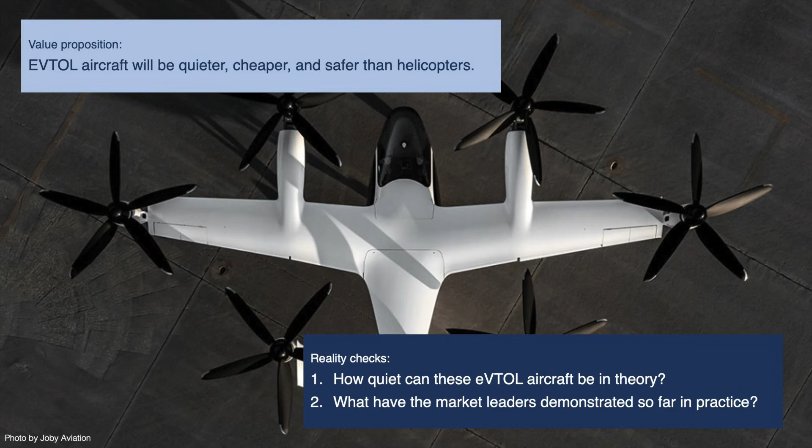To answer these questions, this video reviews patents on noise by Joby Aviation, noise optimizations by the wider industry, and flight test videos by Joby and Archer.

Let's start with Chapter 1. How do aircraft generate noise? To answer this question, we have to understand what sound waves are. Afterward, we will look at a specific subset of sounds we call noise. Finally, we will examine the different sources of aircraft noise.

First, the physical properties of sound waves. An aircraft uses atmospheric air to stay airborne and propel itself forward. In doing so, the air between the aircraft and our ears vibrates, and our hearing system perceives these pressure fluctuations in the air as sounds.

To fully understand how aircraft generate noise and what eVTOL companies are doing about it, let us start from the beginning by reviewing the properties of sound waves with the following clips.

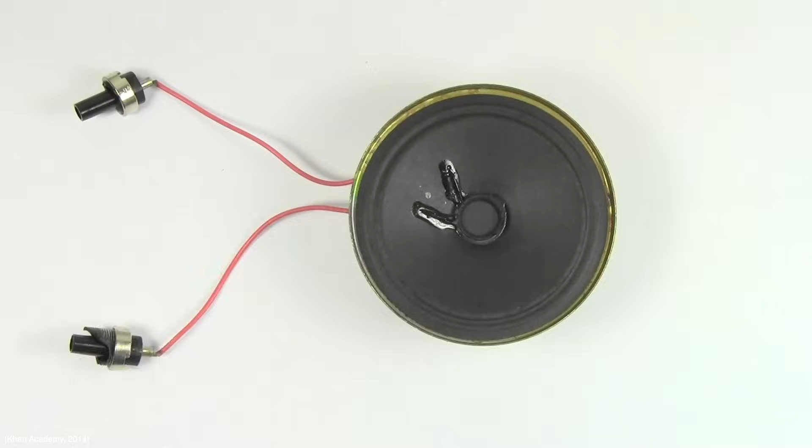This is what a sound wave sounds like. But what does a sound wave look like? Well, the air through which the sound wave is traveling looks something like this. But if you want another visual representation of the sound, we can hook this speaker up to an oscilloscope and it gives us this graph.

We say that this shape represents the sound wave because if we focus on a single molecule of air, we see that it moves back and forth just like a sine or cosine graph. The horizontal axis here represents time, and the vertical axis can be thought of as representing the displacement of that air molecule as it oscillates back and forth.

If we turn up the volume, we see that the oscillations become larger and the sound becomes louder. The maximum displacement of the air molecule from its undisturbed position is called the amplitude.

Another key idea is the period of a sound wave. The period is defined to be the time it takes for an air molecule to fully move back and forth one time. We call this back and forth motion a cycle. We measure the period in seconds, so the period is the number of seconds it takes for one cycle.

If we decrease the period, the time it takes for the air molecules to oscillate back and forth decreases, and the note or the pitch of the sound changes. The less time it takes the air molecules to oscillate back and forth, the higher note that we perceive.

An idea intimately related to the period is called the frequency. Frequency is defined to be 1 over the period. So since the period is the number of seconds per oscillation, the frequency is the number of oscillations per second. Higher notes have higher frequencies and lower notes have lower frequencies.

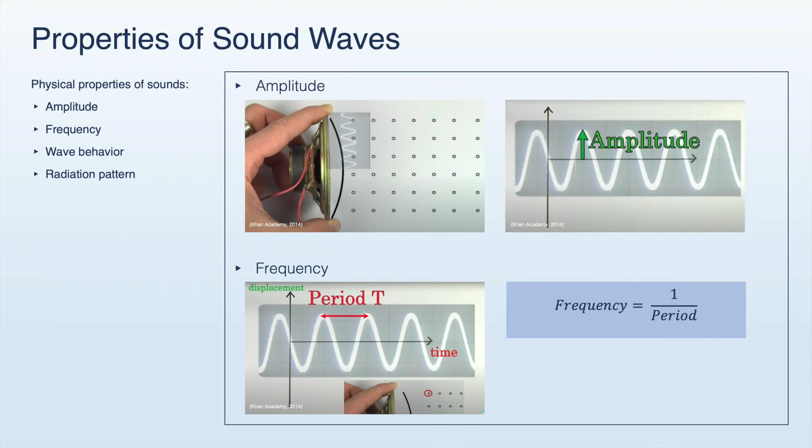As the clip showed, sound waves are pressure fluctuations with an amplitude and a frequency. While we cannot see sound waves with our eyes, we can with experiments.

In this video, we're going to use our Schlieren optics setup to try to visualize sound waves traveling through the air. The transducer here is producing sound waves, and every time it produces a wave, we're going to flash a light on for just a few microseconds, and that will effectively freeze that wave in space. But you're not going to see just one wave frozen in space, because this thing produces 28,000 waves every second. So you will see a whole series of them frozen in space.

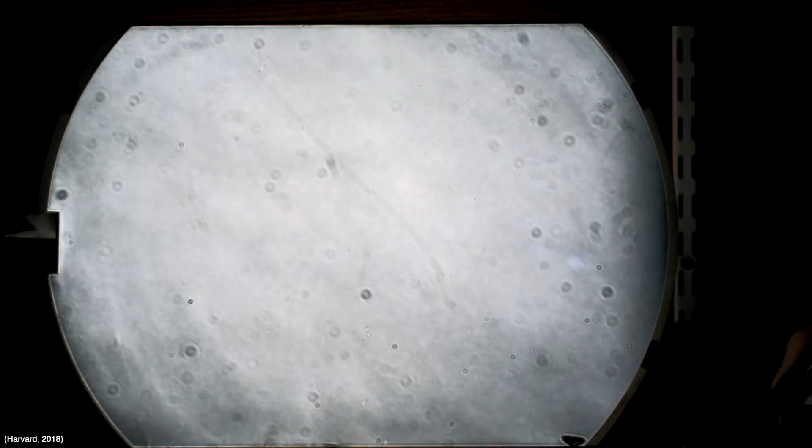So let's have a look. All right, I'm going to turn on the sound waves, the transducer.

Seeing the waves move forward, we can now show you some characteristics common to all waves. Here's a piece of plastic I'm going to use as a reflector and put it into the path of these traveling waves. You can see the waves are reflected upward. If I move the reflector to the other position, I can reflect them downward so they bounce off the base of the mirror and back up again.

If I set this reflector down, you will see that the waves also bend around this barrier. They bend around and actually go into the shadow of the barrier, and this is what we call edge diffraction.

As the clip showed, sound waves propagate in patterns, and they become reflected, diffracted, and absorbed by objects they encounter. Therefore, acoustic and aircraft engineers can manipulate the sound source and its surrounding environment to control how sound waves are radiated and distributed in space, and thus perceived by our hearing system.

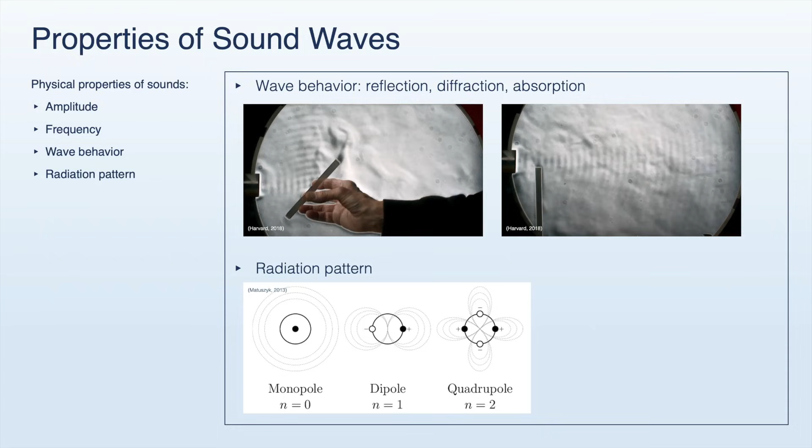Next, let's watch a clip of how common sounds actually look, using the same experimental technique from the previous clip. Here's a book landing on a table, the end of a towel being snapped, a firecracker, an AK-47, and of course, a clap.

We just examined the physical properties of sound waves. Let's move on to the next topic: what is noise, and how can we define it?

Noise is a term for undesirable sounds that evoke negative psychological reactions, such as annoyance, anger, or even pain. Noise generally has two components: loudness and annoyingness.

For example, loud music at a restaurant can be perceived as noisy. However, the same music can be pleasant if the sound level is lowered to the right volume. So, loudness plays a role in our perception of noise, and louder sounds are generally more likely to be noisy.

However, loudness alone is sometimes not enough. For example, music at a concert can be very loud but not perceived as noisy by its attendees. On the other hand, some sounds can be relatively quiet but still considered noise because of their spectral distribution or context. For example, the sounds of a person eating with their mouth open can be quiet but still perceived as noisy by other people.

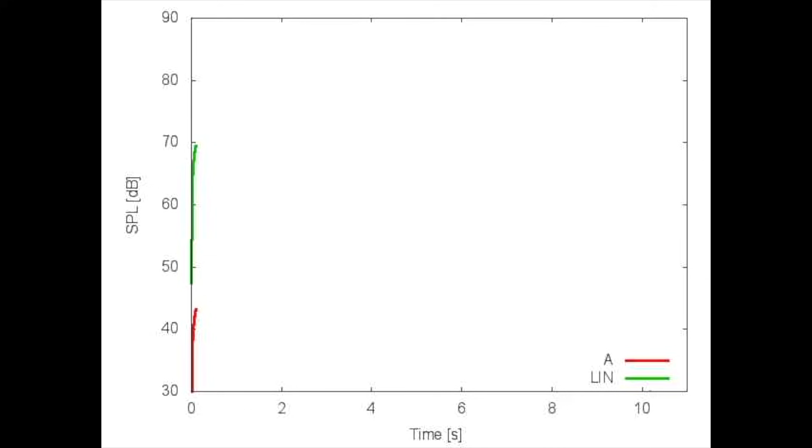Loudness also depends on distance. Sounds become quieter as they move away from the source. One reason is attenuation, which is the conversion of acoustic energy to heat. As air particles transfer the sound wave, they convert some acoustic energy to heat, resulting in the sound wave losing sound pressure and becoming quieter. If you stand further away from the sound source, you receive sound waves that have experienced more attenuation and have lower sound pressures. Furthermore, sound waves with higher frequencies attenuate more quickly.

The other reason is that sound waves propagate and expand. As we saw in the previous clip, sound waves expand outward from their source. Therefore, the acoustic energy gets distributed over an increasingly larger area. For example, consider a spherical propagation pattern. If you double your distance from the source, the sound intensity reduces by a factor of 4. And if you triple your distance, the sound intensity reduces by a factor of 9.

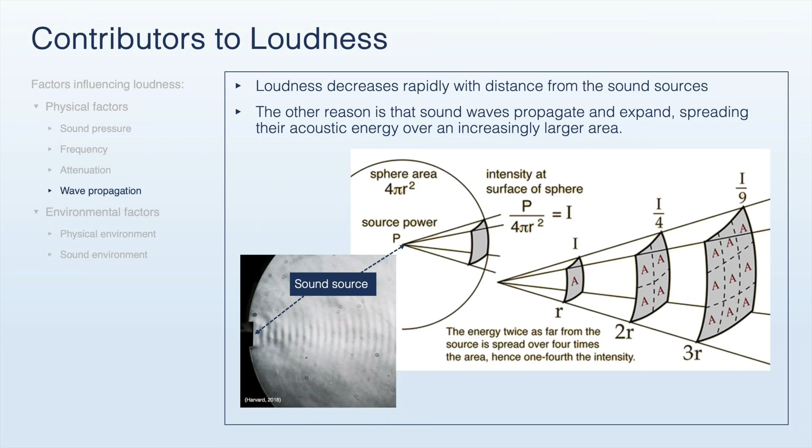Loudness also depends on environmental factors. Sound waves interact with their physical environment. As we saw earlier, sound waves can be reflected, diffracted, and absorbed by objects they encounter. So the physical environment influences how acoustic energy is distributed in space and how we perceive sounds.

For example, is the aircraft flying in an environment with many sound reflective surfaces like asphalt roads and concrete walls? Or is it flying in a more sound benign environment like an open grass field that can absorb sound waves?

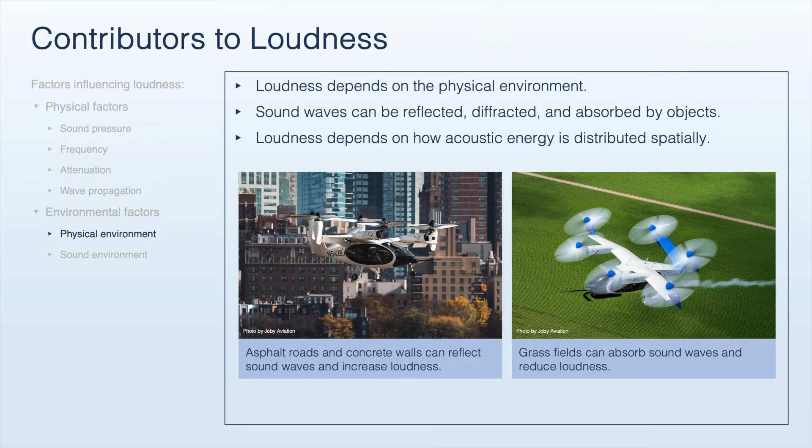The sound environment also plays a role in our perception of noise. Our hearing system constantly searches for sounds that stand out. For example, a person whispering at a loud party may go unnoticed, but the same person can be easily heard in a quiet exam room.

So an eVTOL aircraft may be perceived as noisy in a quiet neighborhood, but may blend in and be less noticeable in a noisy city center.

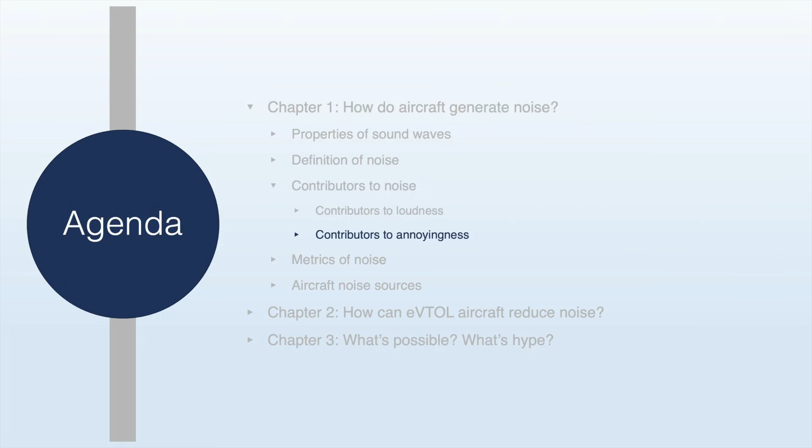We just discussed loudness, one of the two components of noise. Now let's discuss annoyingness, specifically the contributors to annoyingness.

Annoyingness depends on the sound's physical characteristics and the human context. Regarding physical characteristics, sounds can vary in loudness, pitch, duration, rhythm, and so on. Generally speaking, continuous and predictable sounds are less disruptive than intermittent and irregular sounds.

Sounds can also be narrowband or broadband. Narrowband should generally be avoided because they stand out more and capture our attention more easily. For example, a police siren produces tones that grab our attention immediately. On the other hand, sounds generated by the winds or the sea are less distracting and attention-grabbing, even if they are loud, due to their broadband characteristics.

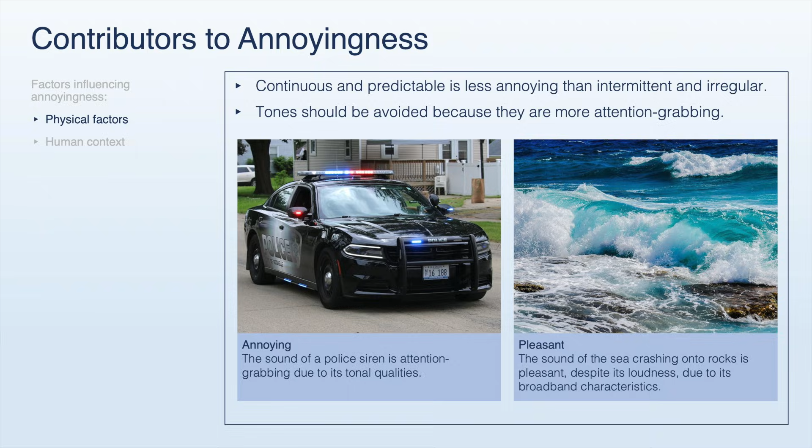The human context also determines whether the sound is disruptive or not. For example, different cultures have different expectations for their sound environment. There are varying norms and tolerances for noise.

People can have different attitudes toward air travel, influencing their perception of the aircraft and, by extension, the aircraft's noise. For example, communities that regularly benefit from air travel may find the noise less irritating because they associate it with something positive.

Psychological factors, such as an individual's mood, stress levels, and focus, also play a crucial role. A person trying to concentrate on a task might find aircraft noise more bothersome than in other situations. On the other hand, people at an airshow may enjoy the sounds emitted by the aircraft.

In summary, noise has two components, loudness and annoyingness. Now let's discuss the different metrics of noise.

Let's start with the metrics of sound pressure. We commonly use a decibel meter with a built-in microphone to measure the sound pressure. The results are displayed in decibels or adjusted to A-weighted decibels.

So what are decibels? It is a dimensionless unit that functions like a percentage, describing a measured sound pressure in terms of a reference sound pressure. For example, a reading of 20 micropascals is converted to 0 decibels, and a reading of 20 pascals is converted to 120 decibels. But why do we use decibels?

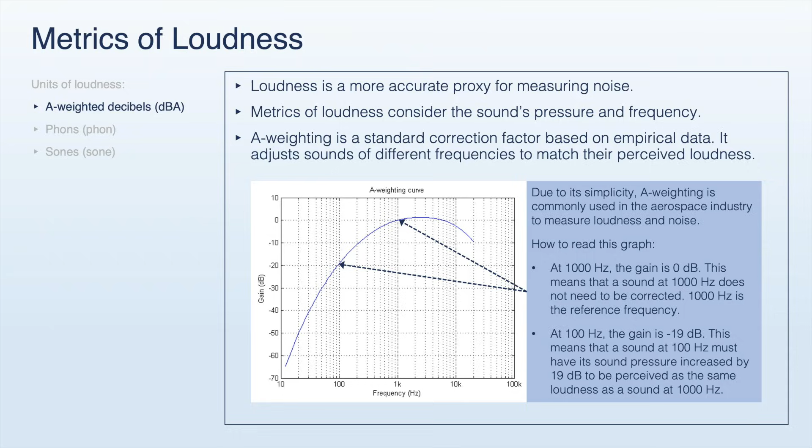Sounds at other frequencies have their decibel values adjusted to reflect their equivalent loudness at 1 kHz. For example, a sound at 100 Hz and 59 decibels would be as loud as a sound at 1 kHz and 40 decibels.

Phon is another unit of loudness and is generally more accurate than A-weighted decibels. The A-weighting curve we saw earlier is based on the 40 phon equal loudness contour of the Fletcher-Munson curves. To create these curves, a group of people were invited to experiments where they were asked to evaluate the loudness of different sounds. In this way, scientists were able to capture the frequency dependency of loudness.

Finally, let's discuss the unit sone. Sones were invented with the help of empirical data to measure loudness on a linear scale, making it more intuitive to use. For example, doubling a sound's sones equals doubling its loudness. Contrast this with pascals and decibels, where doubling a sound's pascals or decibels does not equal doubling its loudness.

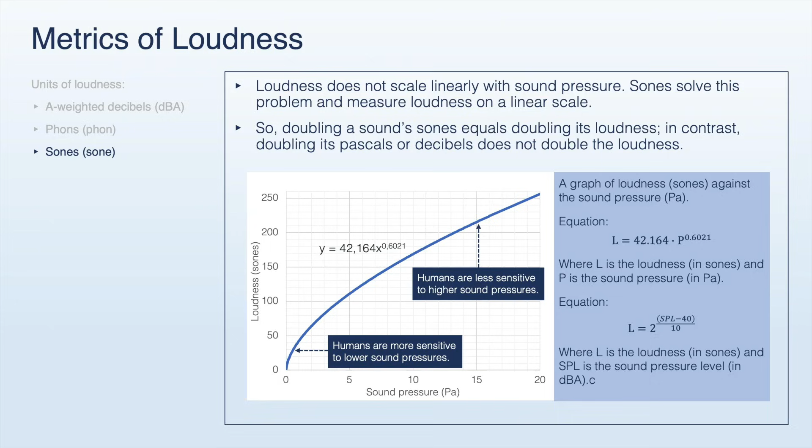We just covered one component of noise. Let's briefly cover the other component, annoyingness. Annoyingness depends on the sound's duration, tonal content, and context.

The metrics sound exposure level and effective perceived noise level are based on A-weighted decibels and consider a sound's annoyingness to measure noise more accurately.

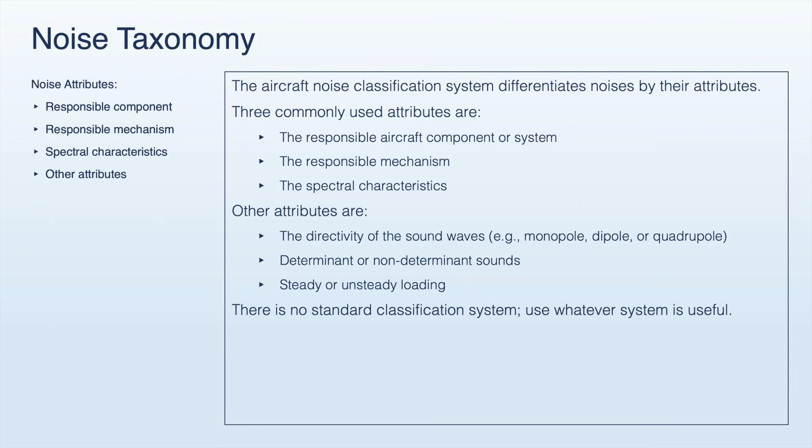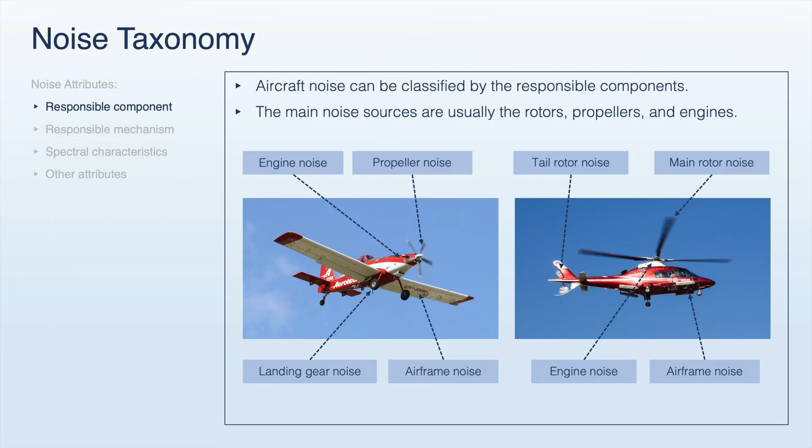Aircraft noise can be classified by the responsible components. The main noise sources are usually the rotors, propellers, and engines. Some noise contributions come from the airframe and landing gear.

Finally, sounds generated by these mechanisms can have different spectral characteristics. For example, they can be tonal or broadband, high frequency or low frequency. An aircraft's spectral characteristics play a crucial role in our perception of loudness and noise, so it's important to distinguish the different noise sources by their contributions to the overall sound profile.

We just covered 3 attributes that are commonly used for noise classification. Other attributes can be considered to improve the discussion in specific contexts. For example, noise can also be classified by the sound wave's directivity, or whether it can be determined analytically. However, we will not use these attributes for our discussion today.

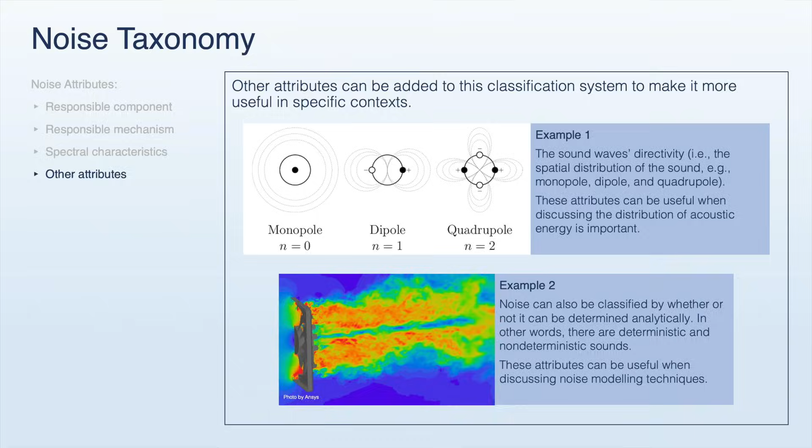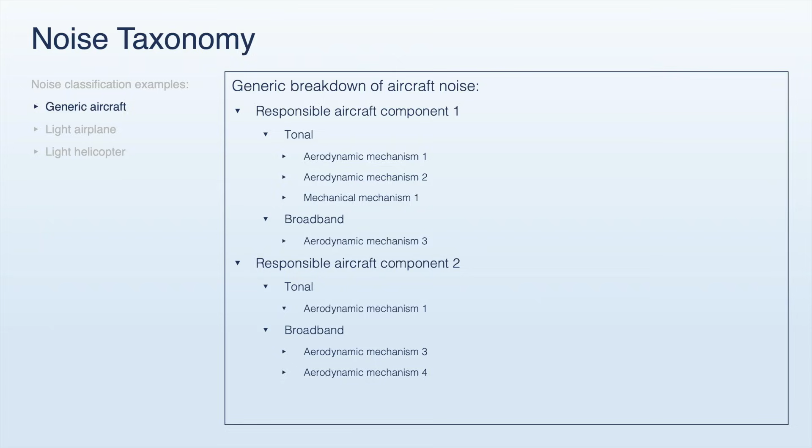By convention, we classify the noise sources as follows. We first classify them by the responsible aircraft components, then by the spectral characteristics, and finally by the responsible mechanism. This hierarchy helps us break down the complexity of aircraft noise and obtain deeper insights into their mechanisms. Let's look at 2 examples to see how this classification system works.

The propeller is the dominant noise source for an airplane, so it is broken down and analyzed as shown. For a helicopter, the main rotor and the tail rotor are the dominant noise sources, making them the focal points of acoustics optimizations.

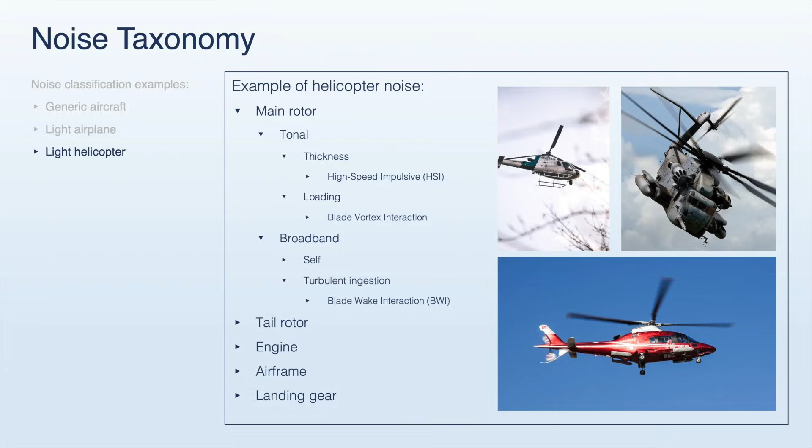Using this classification system, let's examine the different mechanisms for airplane noise. For subsonic aircraft, the main noise sources are the propellers and the engines. The airframe and landing gear are noise contributors, but are generally less noticeable in the presence of a spinning propeller. Hence, for scoping reasons, we will only examine propeller noise today.

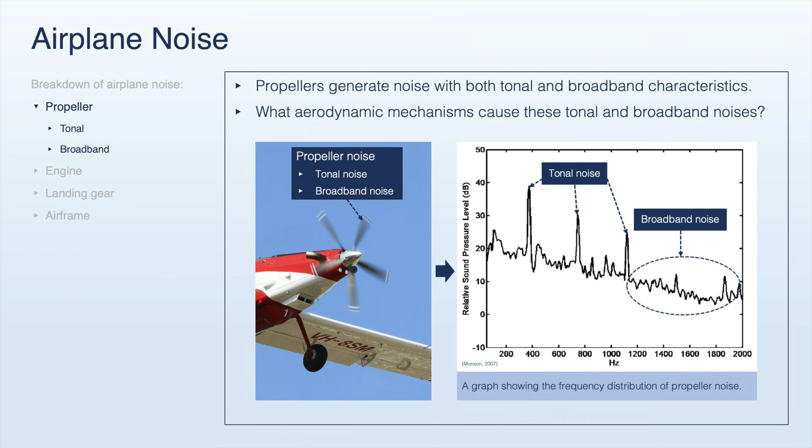The propeller generates noise with both tonal and broadband characteristics. Let's examine the mechanisms for these different characteristics.

Tonal noise is generated by two mechanisms: blade thickness and blade loading. First, as a propeller blade cuts through the air, it forces air to be moved onto its upper and lower surfaces. This air displacement creates pressure fluctuations in the air and, therefore, sound waves and noise. Second, as the air moves along the airfoil, it generates a pressure field and aerodynamic loads like thrust and drag. These aerodynamic loads also result in pressure fluctuations and noise.

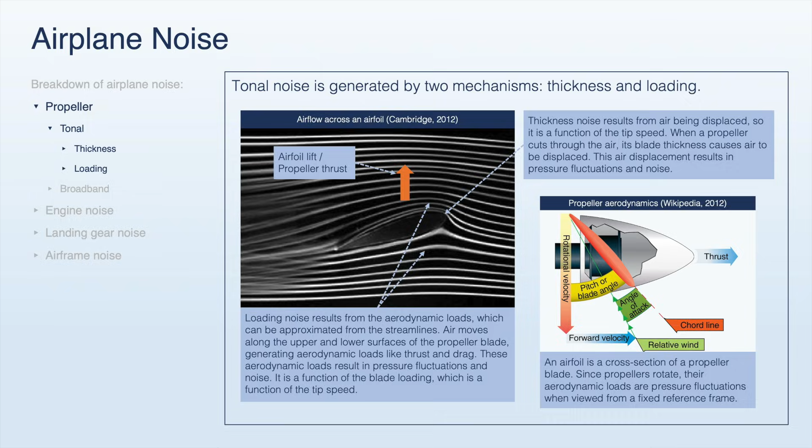But why do air displacements and aerodynamic loads create pressure fluctuations? Since a propeller spins about an axis, the air displacement and aerodynamic loads we just mentioned are based on a rotating frame. Hence, from a stationary point of view, these occur in an oscillatory manner. For example, the propeller blade causes air to compress in half of a revolution, but causes it to decompress in the other half. The same compression and decompression are repeated in the next revolution, resulting in pressure fluctuations. These pressure fluctuations occur at a frequency equivalent to the propeller's rotational speed.

The frequency of tonal noise depends on the frequency at which propeller blades pass a fixed point, the blade passage frequency. In other words, the frequency equals the number of revolutions per second multiplied by the number of propeller blades. If the number of revolutions per second increases, the sound wave's frequency and pitch also increase. This is why, for example, your washing machine has a lower pitch when spinning slowly, but a higher pitch when spinning faster.

Regarding the blade count, if the number of propeller blades increases, the sound wave's frequency and pitch also increase. For example, if the blade count is doubled from 2 to 4 and the rotational speed is held constant, then the blade passage frequency doubles and the tonal noise increases by an octave in pitch.

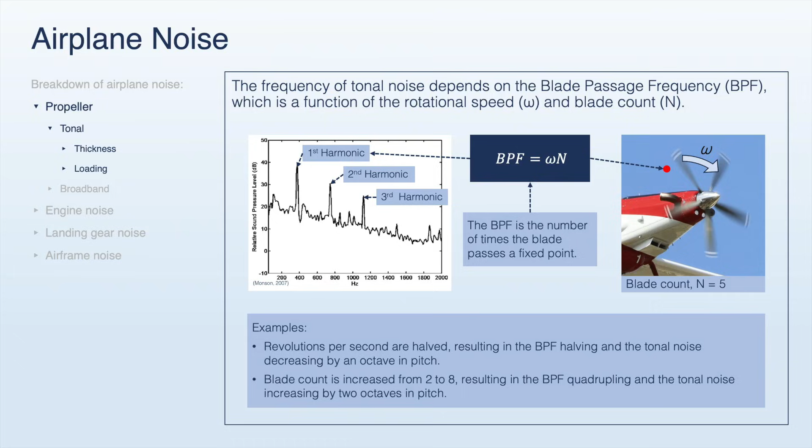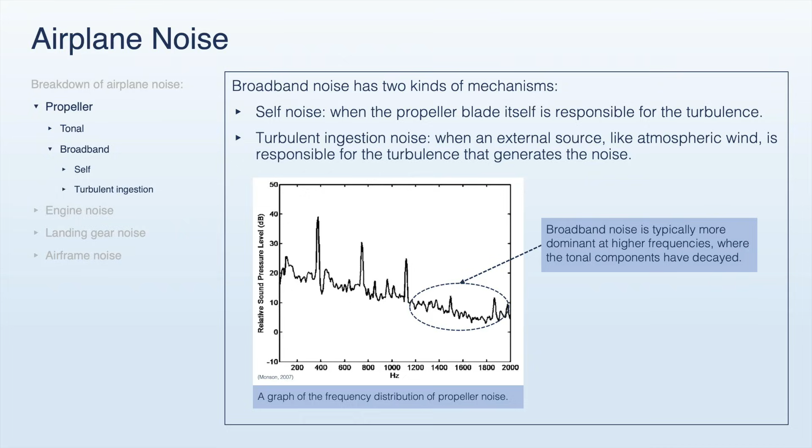Next, let's discuss broadband noise. Broadband noise results from random pressure fluctuations on the blade surface. It is typically more dominant at higher frequencies where the tonal components have decayed. These random pressure fluctuations are generated by the blade itself or induced by an external source, such as winds or the turbulent wake of another propeller.

Then there is turbulent ingestion noise. This category includes, for example, blade-wake interaction noise and atmospheric turbulence interaction noise. Blade-wake interaction noise results from a blade passing through the wake of a preceding blade or the wake of a preceding propeller. Atmospheric turbulence interaction noise is due to the propeller interacting with turbulent winds.

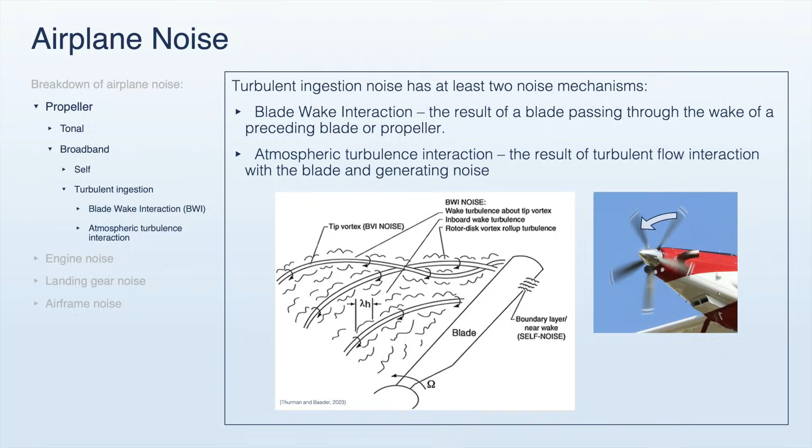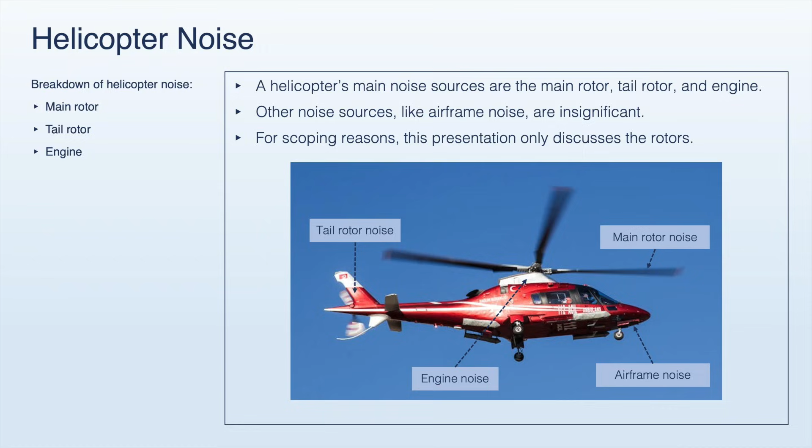Okay, we just covered airplane noise. Next, let's talk about helicopter noise. For a helicopter, the major noise sources are the main rotor, the tail rotor, and the engine. For scoping reasons, we will only examine the main rotor today.

Rotor noise can also be divided into tonal and broadband components, just like before with propeller noise. The tonal components can be attributed to the rotor blade thickness and aerodynamic loading, as was the case for propeller noise.

However, a key difference between rotors and propellers is that a rotor can have high-speed impulsive noise. This is generated when the rotor blades, typically on the advancing side, reach transonic or supersonic speeds. Compressibility effects become significant as the blade's relative airspeed approaches the speed of sound, leading to shock waves and sonic booms.

Helicopters have rotors operating in edgewise flow, so the relative airspeed at the advancing blade is the sum of the flight speed and tip speed. In contrast, airplanes have propellers operating in axial flow, so there are no advancing and retreating blades, and the relative airspeeds at the blades are mostly uniform. Therefore, airplanes do not have high-speed impulsive noise.

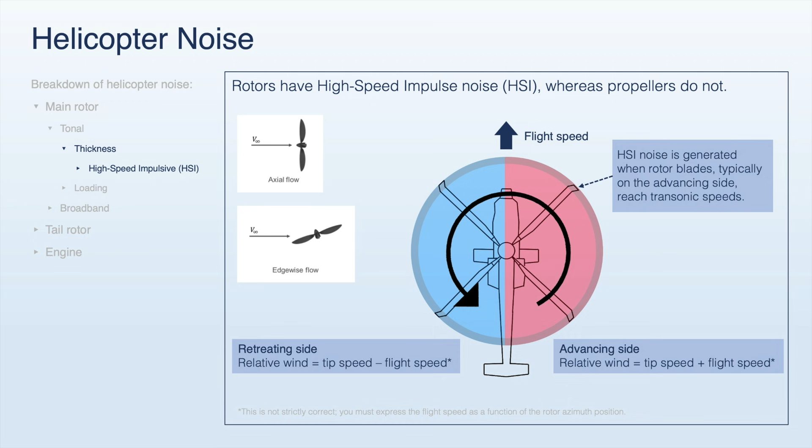Another key difference between rotors and propellers is that rotors can have blade vortex interaction noise, otherwise known as blade slaps. Blade vortex interactions are usually the noisiest mechanism, as they can result in very loud sounds. They result from a rotor blade interacting with the tip vortex of a preceding blade. This interaction leads to impulse-like loading at the rotor's leading edge, and this noise appears as sharp impulses on a sound spectrum.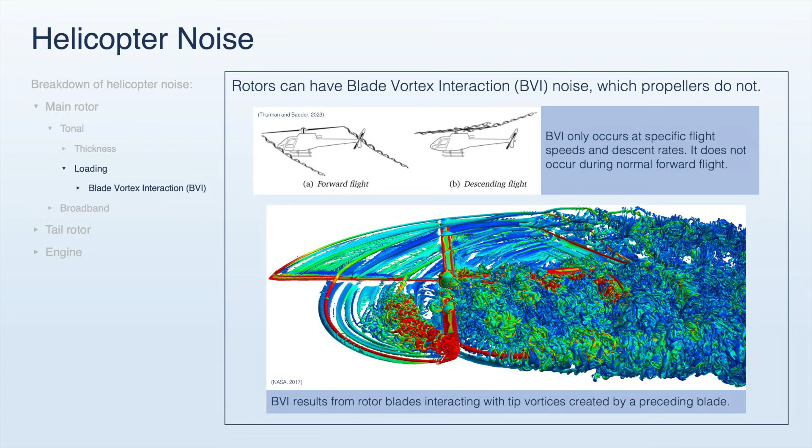Here is a demonstration of blade slaps. First, this is what tip vortices look like. This is what blade vortex interactions look like.

So I'll show you guys what blade slap is here. Blade slap occurs if you're at a high rate of speed and a low collective setting. So I'm going over the top of Mark Johnson's house here. We'll throw a little blade slap in there to wake him up.

Hey, you guys hear that? That's blade slap. If I go farther down, it goes away. If I come back up like that, it goes away.

In summary, here are the key points for how aircraft generate noise. First, noise is an undesirable sound and a subjective metric. Noise is a function of loudness and annoyingness, and sound pressure can be used as a basic proxy for noise measurements. More accurate noise metrics use empirical data to capture the human's subjective response to different sounds. Aircraft certification requires accurate noise metrics like the sound exposure level or the effective perceived noise level.

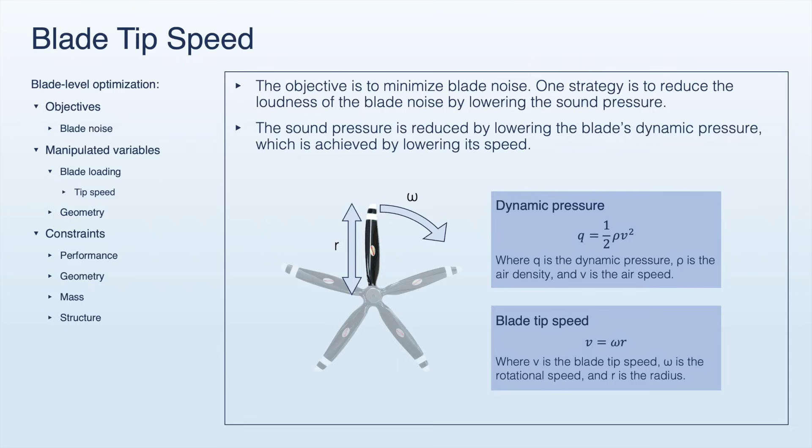Let's first discuss noise reduction strategies at the blade level. Blade tip speed: the objective is to minimize blade noise. One strategy is to reduce the loudness of the blade noise by lowering the sound pressure. The sound pressure is reduced by lowering the blade's dynamic pressure, which is achieved by lowering its speed. However, other engineering constraints, such as physical space and weight, limit the extent to which the blade speed can be lowered. As this equation shows, the dynamic pressure is a function of the speed squared.

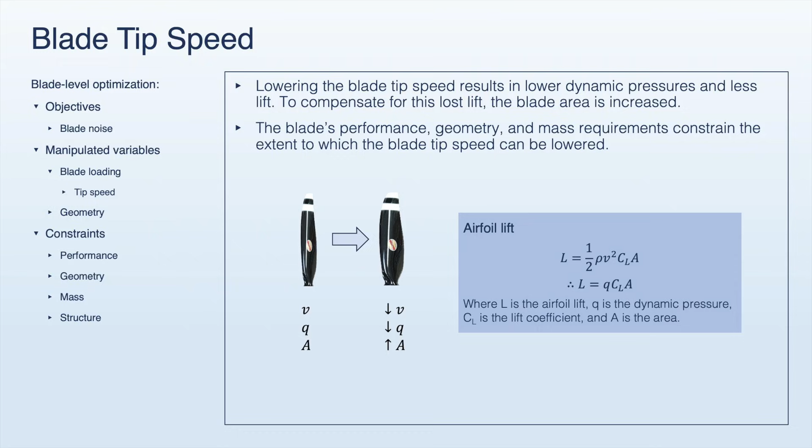So, on the one hand, we want to lower blade tip speeds to achieve lower dynamic pressure. But, on the other hand, we are constrained, because lower dynamic pressure means we must increase the blade area to maintain the thrust requirement. New technologies and innovation can move conventional design constraints. For example, Joby's propeller blades are made of carbon fiber and titanium, which use their low mass densities to enable large propellers and lower blade tip speeds.

So here's one of the propulsion blades. It's carbon fiber with a titanium root sleeve. This, combined with the very high specific torque motor, is what makes the acoustic profile possible.

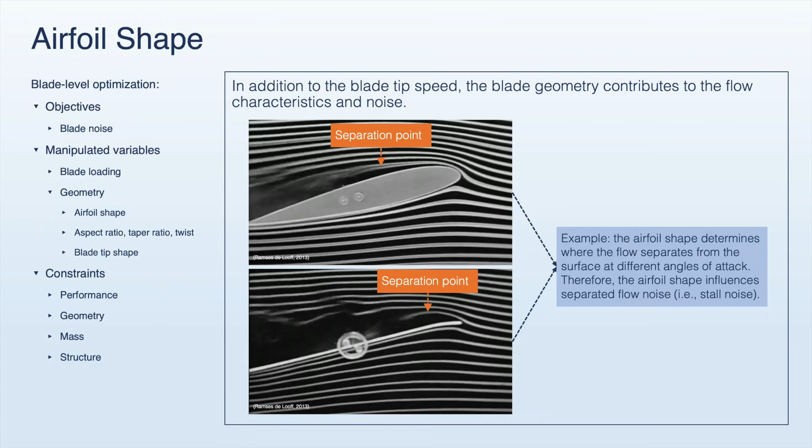Airfoil shape: in addition to the tip speed, the blade geometry contributes to the flow characteristics and noise. For example, the airfoil shape determines where the flow separates from the surface at different angles of attack. Therefore, the airfoil shape influences separated flow noise, otherwise known as stall noise. Electric vertical takeoff and landing brings new design challenges and approaches for airfoil shapes.

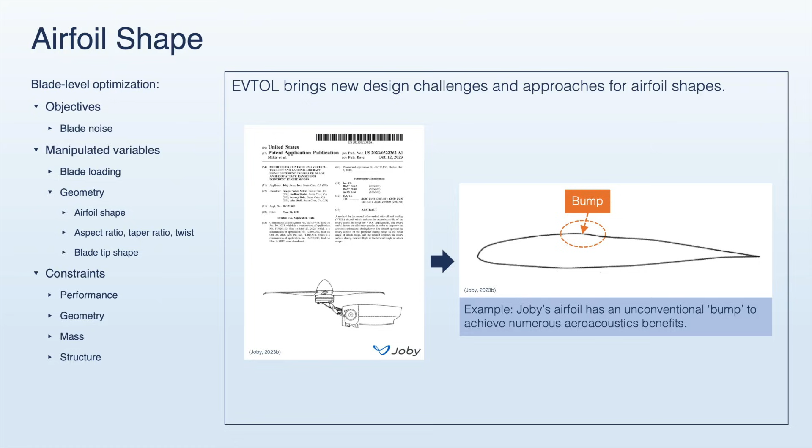For example, Joby's airfoil has an unconventional bump to achieve numerous aeroacoustics benefits. The first benefit is that Joby's airfoil enables the propeller blade to be more evenly loaded than a conventional airfoil when operating under asymmetrical inflow conditions.

When the eVTOL aircraft is flying, its rotor blades can meet random air turbulence. This turbulence means that the airflow across the rotor blade varies in speed and direction, so the blade sections experience different effective angles of attack. As a result, the blade sections generate different levels of lift and drag, creating pressure fluctuations in the air and thus noise.

The second benefit is that Joby's airfoil enables more gentle stall behavior and possibly reduces noise from flow separation.

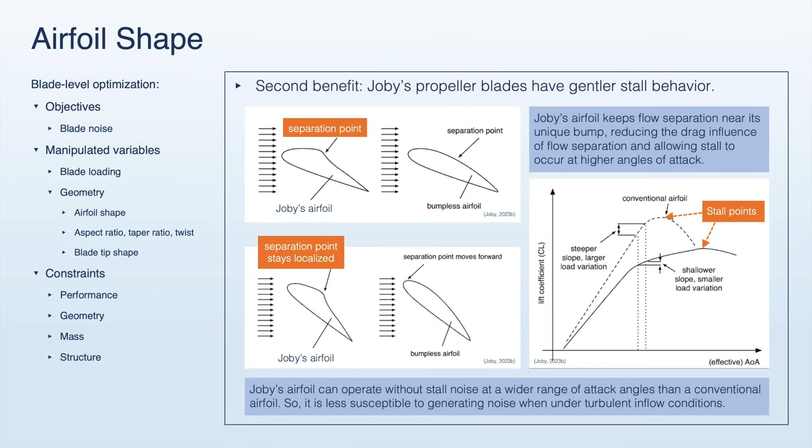Other important blade parameters include the taper ratio, the twist rate, and the aspect ratio. These three parameters can be varied to optimize the blade loading distribution, tip losses, and noise. For example, a higher taper ratio and a higher aspect ratio minimize the pressure losses and tip vortices at the blade tip. Thus, like other aerospace companies, Joby uses acoustics modeling, simulations, and experiments to optimize these blade parameters for noise.

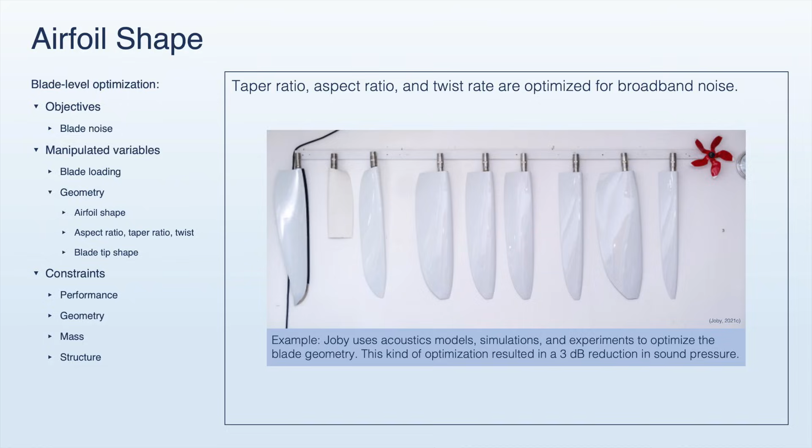Next, let's compare eVTOL aircraft to conventional aircraft at the blade level. Aeroacoustics optimization at the blade level can also be conducted for all other aircraft types, including conventional helicopters. For example, Eurocopter's Blue Edge blades use a unique geometry to lower noise. So, electric vertical takeoff and landing does not bring an inherent aeroacoustic advantage at the blade level.

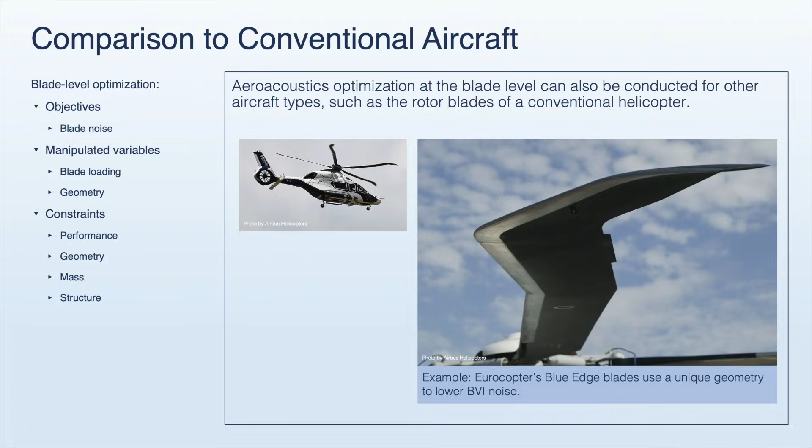Next, let's talk about noise reduction strategies at the rotor or propeller level. First, rotor solidity. The objective is to minimize rotor noise. A rotor consists of rotor blades, so one strategy is to reduce the sound pressure by lowering the blade loading. The blade loading can be lowered by decreasing the disc loading or increasing the rotor solidity.

Since eVTOL aircraft have much higher disc loadings than conventional helicopters, they must use higher rotor solidities to achieve low noise. However, higher rotor solidities have several downsides, including greater rotor weight, greater motor weight, and lower efficiency.

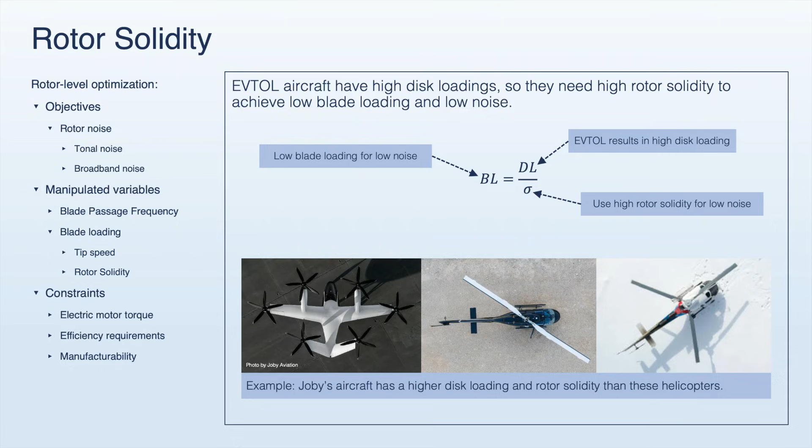As these pictures show, Joby's aircraft have higher rotor solidities than comparable helicopters. As discussed, this is because the blade loading must be low to minimize pressure fluctuations and sound pressure. But at the same time, electric vertical takeoff and landing results in high disc loadings. Joby mitigates the downsides of high rotor solidity with a propeller made of carbon fiber and titanium and an electric motor with a very high specific torque.

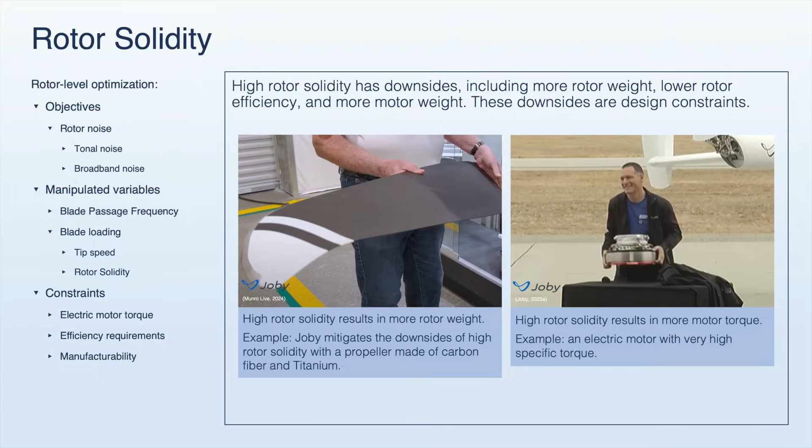Blade passage frequency. As discussed in Chapter 1, the blade passage frequency determines the pitch of the sound waves. One way to reduce noise is to increase the frequency so the sound waves become ultrasonic and inaudible to humans. The following clip demonstrates the potential of this noise reduction strategy.

Most engines are very loud.

For now, why don't you tell us, just super high level, what are the things that can keep an engine like yours both efficient but also quiet? Yeah, so the trick that we do is we take all of the sources of noise, we minimize them, and then we push the tones that you would typically hear, which is the blade passage frequency, up into the ultrasonic. Blade passage frequency is a function of the rotations per second and the number of blades that you have. Most fans, open rotors, propellers, ducted fans, they have 2, 5, maybe 20 blades. And they're spinning at a reasonable RPM or rotation per second that puts that frequency right in human hearing. So to get it into the ultrasonic, it has to spin faster. But there's problems with taking the same fan and spinning faster. There's contributions to the noise that go with the fifth power of the tip speed. And if you imagine that tip speed is a huge contributor and it's a function of your rotations per second, you can't just spin faster to get to lower noise. So our trick has been, we've developed this high blade count fan that you can actually rotate at a reasonable rotation per second. That still puts the blade passage frequency up into the ultrasonic and allows us to do really clean and efficient work as it spins.

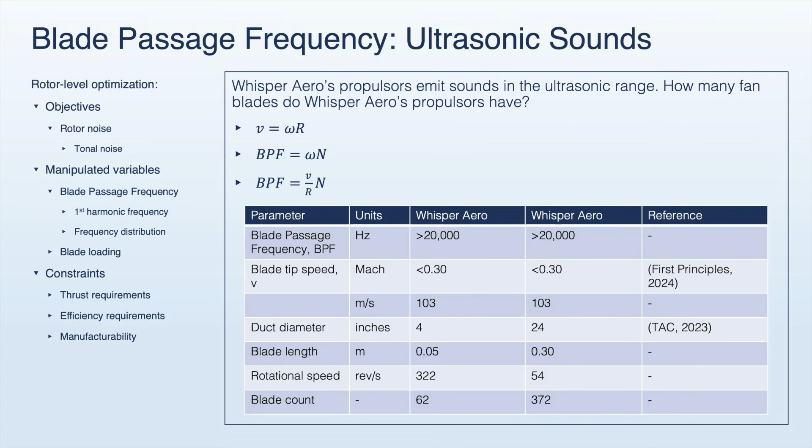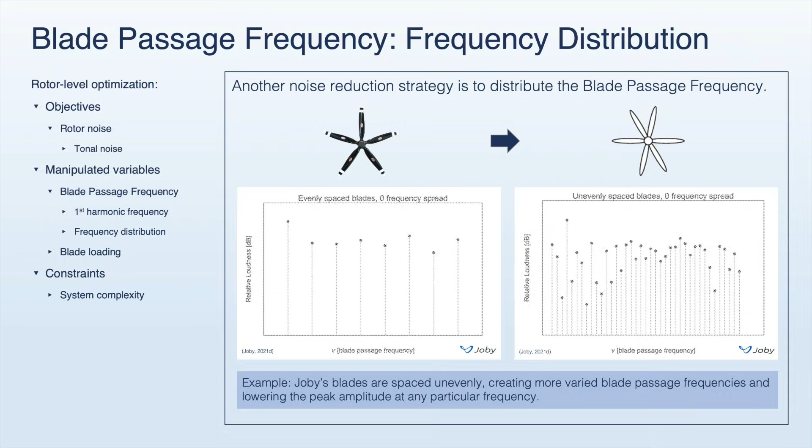There is another idea related to the blade passage frequency. The other noise reduction strategy is to distribute the blade passage frequency. For example, Joby's blades are spaced unevenly, creating more varied blade passage frequencies and lowering the peak amplitude at any particular frequency. As a result, Joby lowers the peak acoustic power and therefore lowers the perception of loudness and noise.

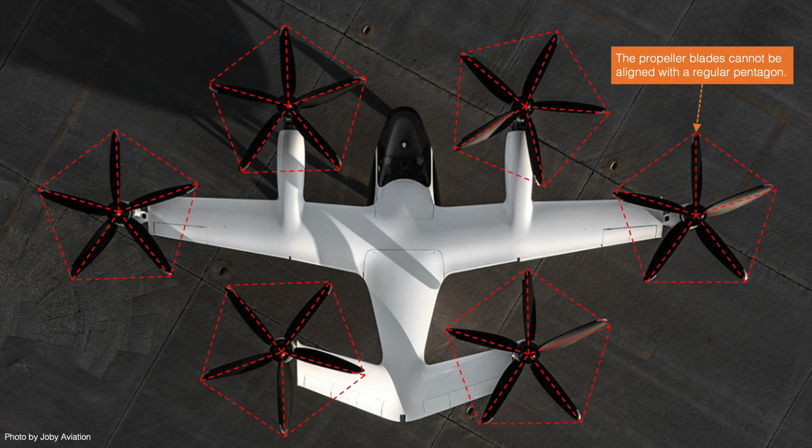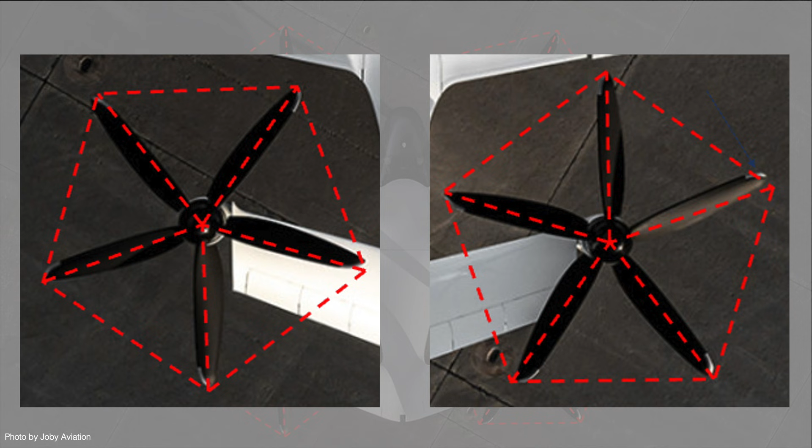Ducts with acoustic liners. Ducts encase the rotor, fan or propeller and reduce noise by absorbing some of the acoustic energy. Acoustic liners on the inner walls of the duct improve sound absorption further, and they can be designed to target specific frequencies to become even more effective.

However, ducts do not scale well with rotor diameter due to increasingly larger excessive weight and drag. Therefore, ducts must be kept small in diameter, and as a result, are not a viable noise mitigation strategy for eVTOL aircraft.

Next, let's compare eVTOL aircraft to conventional aircraft at the rotor level. Aeroacoustics optimization at the rotor level can also be done for conventional aircraft. For example, Airbus's H160 has a duct tail rotor instead of an open tail rotor.

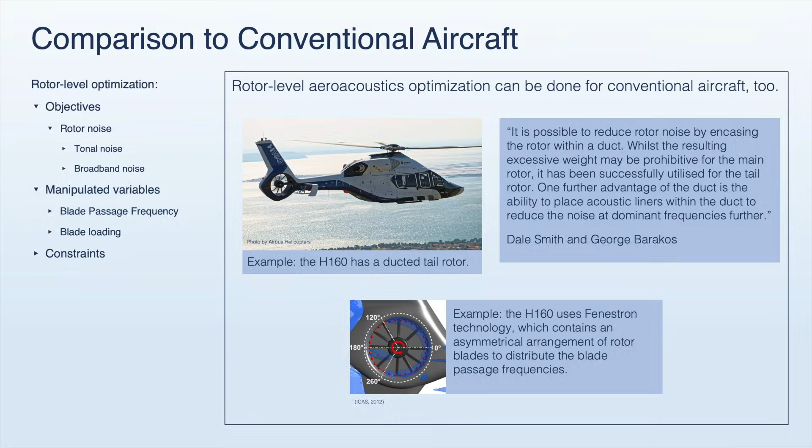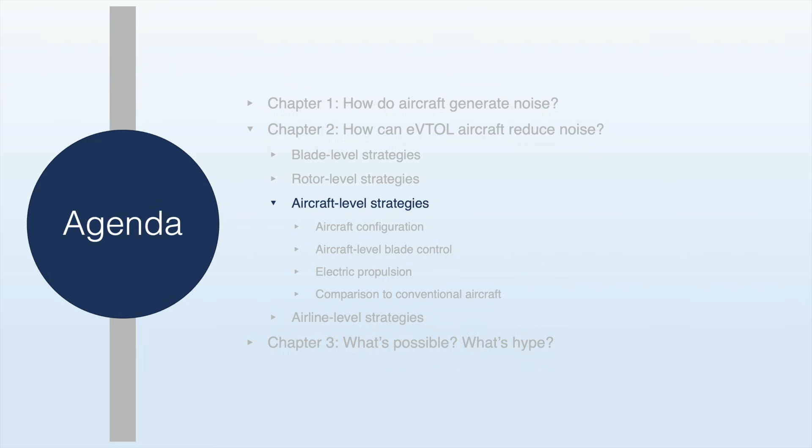Okay, we just talked about isolated rotor designs and operation. Now, let's talk about noise reduction strategies at the aircraft level. Aircraft configuration: the objective is to lower aircraft level noise.

One strategy is to optimize the aircraft configuration for aeroacoustics. For example, the following strategies can be considered to avoid rotor-airframe interaction noise: increasing the separation distances between the rotor and the airframe, and avoiding pusher propeller configurations that are near a fuselage, rotor wake, or wing wake.

Aircraft level blade control. A particularly important aeroacoustics interaction is the blade vortex interaction, because it is a very large noise contributor for rotorcraft. Winged eVTOL aircraft can also have blade vortex interactions, since their propellers are in edgewise flow during thrust-borne flight. For example, these pictures show that Joby's aircraft can still have blade vortex interactions at certain flight speeds and descent rates.

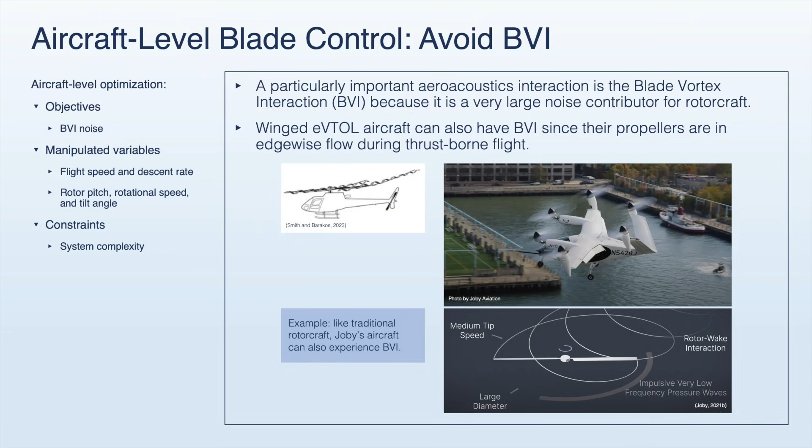Helicopters avoid blade vortex interactions by controlling their flight speeds and descent rates. eVTOL aircraft have the potential for even better control. Joby, for example, avoids blade vortex interactions by controlling each individual propeller's tilt angle, rotational speed, and blade pitch.

Unfortunately, Joby's website does not detail any specific information about this control method. In any case, this method would only be feasible for eVTOL aircraft with distributed electric propulsion. If this method is effective, it can be very valuable in reducing noise during the eVTOL aircraft's transition phases.

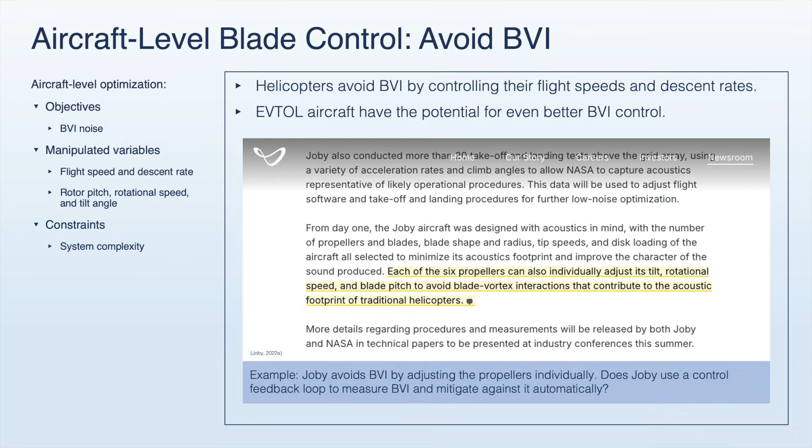Another strategy is controlling the rotor-rotor aeroacoustics interactions. Aeroacoustics interactions between two or more rotors can be minimized by adjusting the rotor phases. Depending on the strategy, noise can be reduced via a reduction in radiation efficiency or through superposition. Both strategies require precise rotor azimuth positions relative to other rotors. Electric motors enable more accurate azimuth position control, making this noise reduction strategy more viable.

Another strategy is to control the propeller's frequency distribution. For example, Joby controls the blade passage frequency of every propeller, making every propeller emit a slightly different pitch and spreading the acoustic power over a greater frequency range. This frequency control is achieved by a control feedback loop at every propeller.

The control loop uses a microphone to measure the tonal noise emitted by the propeller. It then manipulates the rotational speed and thus controls the blade passage frequency. The control loop then adjusts the propeller blade pitch to compensate for the thrust changes made by the rotational speed.

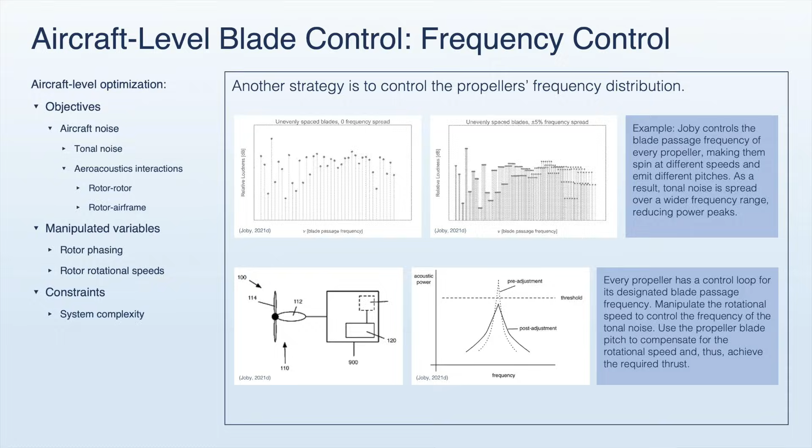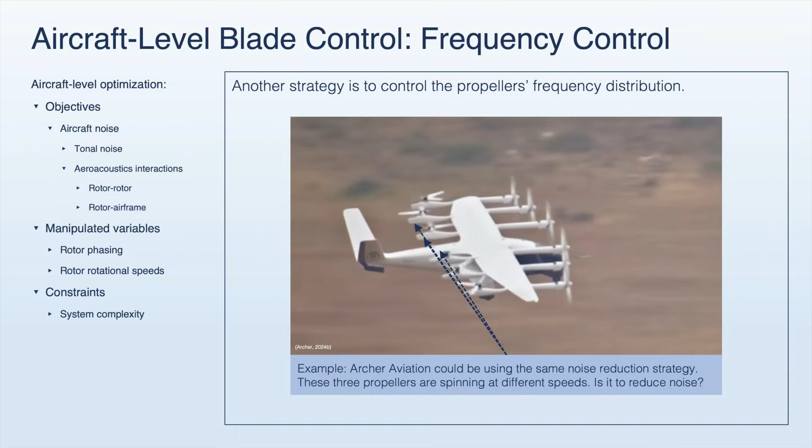Another example of the strategy is Archer Aviation. The following video from earlier this year shows that the Archer Midnight aircraft flies with the propellers spinning at different speeds. Is Archer also using the strategy to reduce noise?

Electric propulsion system. We will not cover this topic in detail. In short, if you exclude aerodynamic noise, electric propulsion is quieter than combustion-based propulsion since it has fewer mechanical mechanisms.

Next, let's compare eVTOL aircraft to conventional aircraft at the aircraft level. Evidently, conventional and eVTOL aircraft have significantly different configurations and propulsion systems, which are the reasons for the aeroacoustics differences. Many of the noise reduction strategies at the aircraft level are exclusive to distributed electric propulsion. However, there are downsides too. As we discussed earlier, eVTOL aircraft have multiple rotors, so they have more rotor-rotor and rotor-airframe interactions.

Many eVTOL aircraft are designed from scratch, so their manufacturers can use modern aeroacoustic simulations powered by state-of-the-art hardware and software to optimize their eVTOL aircraft for noise from scratch. Traditional companies are not as well positioned as startups to adopt these new aeroacoustic simulation tools in their design processes.

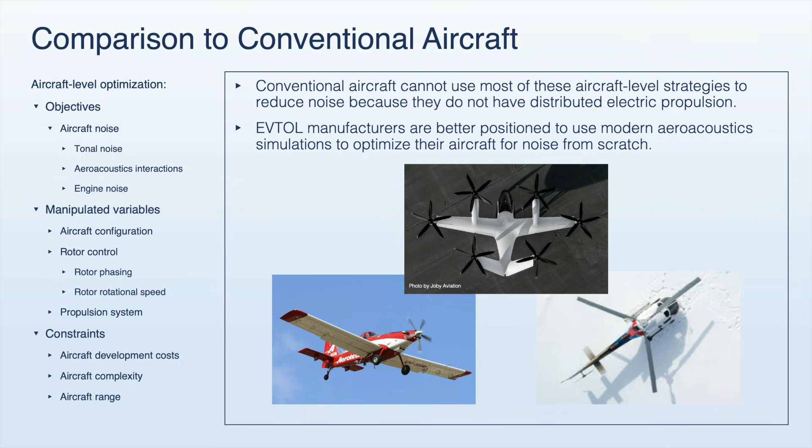Okay, let's now talk about noise reduction strategies at the airline level. Flight plan and operations. We will not cover this topic in detail. In short, the objective is to minimize noise at an airline operation level.

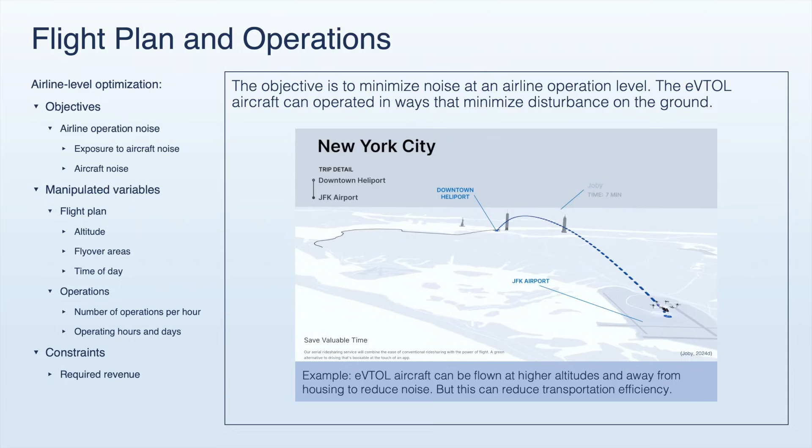The eVTOL aircraft can be operated in ways that minimize disturbance on the ground. For example, the eVTOL aircraft can be flown at higher altitudes and away from people to reduce noise. However, this can come at the cost of transportation efficiency because the eVTOL aircraft may need to take a longer route.

Let's briefly compare eVTOL aircraft to conventional aircraft at the airline level. The same noise regulations and limits that apply to conventional aircraft would also apply to eVTOL aircraft. Hence, for a given noise budget, if the aircraft is quieter, more of them can be used. For example, if Joby's aircraft could be as quiet as shown in this simulation, it could fly new routes without disturbing people, or fly existing routes in greater volume, assuming noise was the limiting factor.

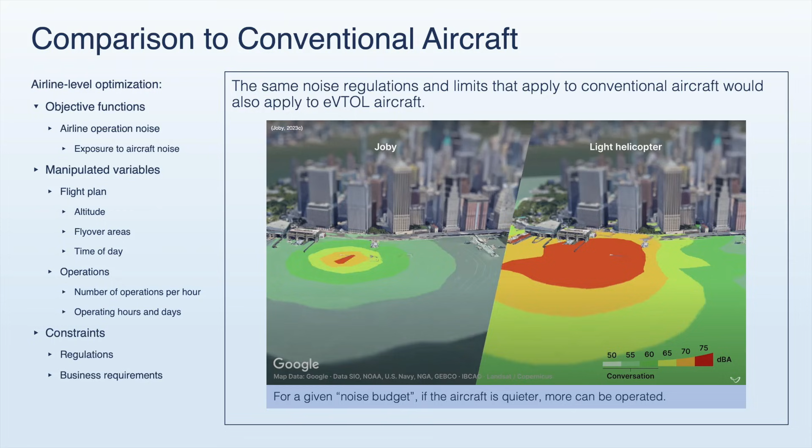In summary, here are the key points of Chapter 2. There are various strategies for reducing noise. Blade, rotor, and airline level strategies can be applied to both eVTOL aircraft and conventional aircraft. The differences are at the aircraft level due to distributed electric propulsion. For example, eVTOL aircraft can control their rotors to avoid blade vortex interactions. They can also spin their rotors at different speeds to spread the acoustic energy across more frequencies and reduce tones.

Many eVTOL aircraft are designed from scratch, hence companies can use modern aeroacoustic simulations powered by state-of-the-art hardware and software to optimize their eVTOL aircraft for noise from scratch. eVTOL companies can also use more advanced noise metrics to optimize their eVTOL aircraft. Traditional companies are not as well positioned as startups to adopt these new aeroacoustic simulation tools in their design process.

Chapter 3. What is possible for eVTOL noise? And what is hype? Is it possible for eVTOL aircraft to be 100 times quieter than a helicopter?

Archer and Joby have similar claims regarding noise. For example, Archer claims, 'At takeoff and landing, we designed the aircraft to be 10 times quieter than a helicopter. And during cruise flight 2,000 feet above cities, we designed the aircraft to be 100 times quieter.' Similarly, a blog article on Archer's website states, 'The design of Maker is such that the noise that reaches the ground should measure around 45 A-weighted decibels, almost 100 times quieter than that of a helicopter.'

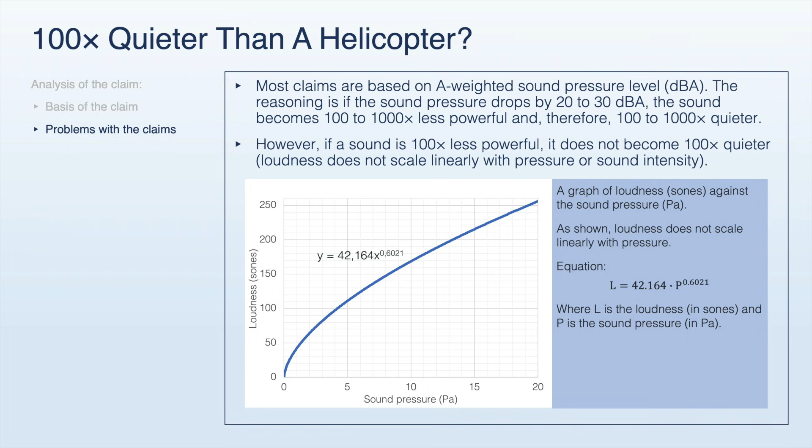There are problems with these claims. These claims are based on A-weighted sound pressure level. The reasoning is if the sound pressure drops by 20 to 30 A-weighted decibels, the sound becomes 100 to 1,000 times less powerful, and therefore 100 to 1,000 times quieter. However, as explained in Chapter 1, if a sound is 100 times less powerful, it does not become 100 times quieter, because loudness does not scale linearly with pressure, nor does loudness scale linearly with the sound intensity.

So, what's the actual change in loudness? If we use Archer's and Joby's assumptions and recalculate with the necessary corrections, we find that an eVTOL aircraft would be approximately 4 to 8 times quieter than a helicopter. However, I repeat, these numbers are all based on Archer's and Joby's assumptions.

So, let's go back to the statements by Archer and Joby. Here, the use of 100 times quieter is incorrect. In contrast, 1,000 times more powerful accurately describes sound intensity. The use of 1,000 times louder than our eVTOL aircraft is certainly incorrect. The use of emits 100 times less noise is questionable and unlikely, since the loudness only differs by 1 order of magnitude or less, and the tonal qualities cannot make up for the remaining order of magnitude. 100 times less acoustic energy is an accurate description.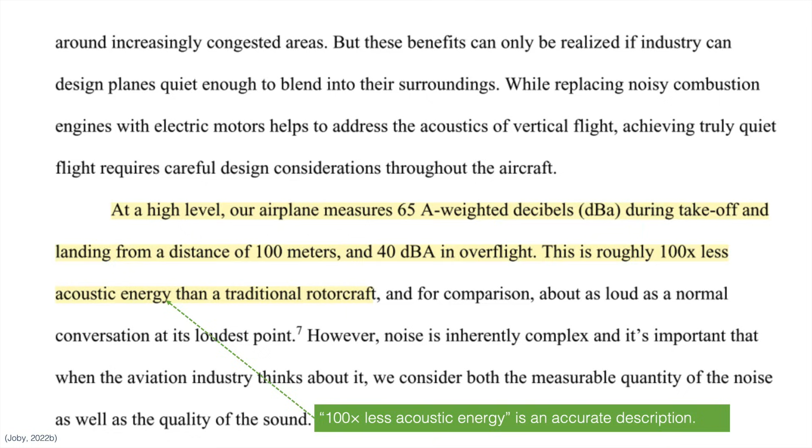In summary, it seems that Archer and Joby may have, at times, misunderstood or misrepresented the concepts of loudness, decibels, and sound intensity. Using their assumptions, their aircraft would not be 100 to 1,000 times quieter than a helicopter, but only 4 to 8 times quieter.

Review of Archer and Joby.

Hoverflight noise. How do Archer's claims compare to independent measurements? Archer stated that its aircraft would be 10 times quieter than a helicopter during takeoff and landing. Though Archer gave no official values for the sound pressure level or effective perceived noise level, we can safely assume that a 10-fold loudness reduction is impossible.

We can get a more realistic estimate of Archer's status by using data from other industry observers and analysts. For example, the YouTuber eVTOL Research posted a video on Archer and Joby. In this video, they traveled to Salinas Airport and recorded and measured Archer's Midnight aircraft. They measured an audio level of 74.8 decibels at a distance of 85 meters. If we extrapolate the YouTuber's data, we find that Archer's Midnight aircraft would have around 73 decibels at 100 meters.

Compared to a helicopter at 80 to 90 decibels, Archer's aircraft would be roughly 2 to 4 times quieter. Interestingly, if we calculate the sound pressure inside the aircraft, we find a sound pressure level of 93 decibels at 10 meters. At this level, I imagine hearing protection would be mandatory for passengers and pilots.

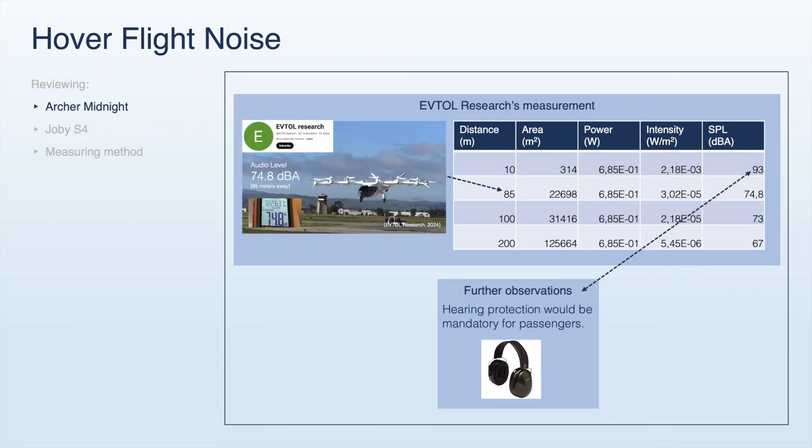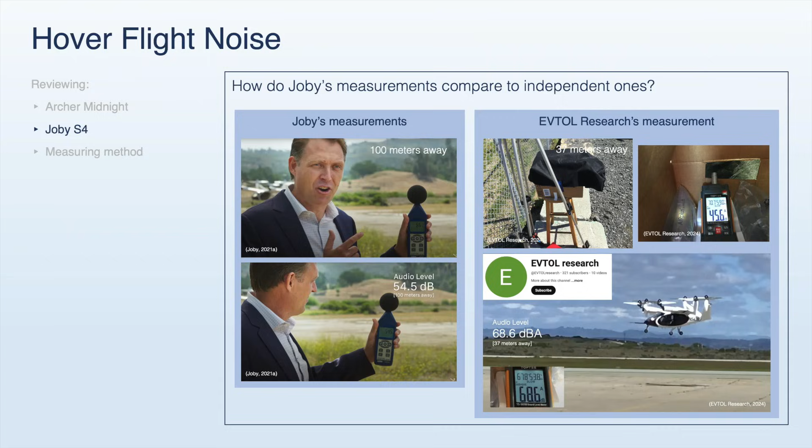Next, let's examine Joby. How do Joby's measurements compare to independent ones? In one of Joby's YouTube videos, they measured an audio level of 54.5 decibels at a 100-meter distance from their aircraft. In comparison, the YouTuber eVTOL Research got a value of 68.6 decibels at a distance of 37 meters. Like before, if we extrapolate the YouTuber's data, we find that Joby's prototype would have 60 decibels at 100 meters.

So, our extrapolated value of 60 decibels is higher than Joby's measured value of 54.5 decibels. On Joby's website and in Joby's written testimony to the US Congress, Joby states that the aircraft measures 65 decibels during takeoff and landing from a distance of 100 meters. In this case, our extrapolated value of 60 decibels would be lower than Joby's estimate.

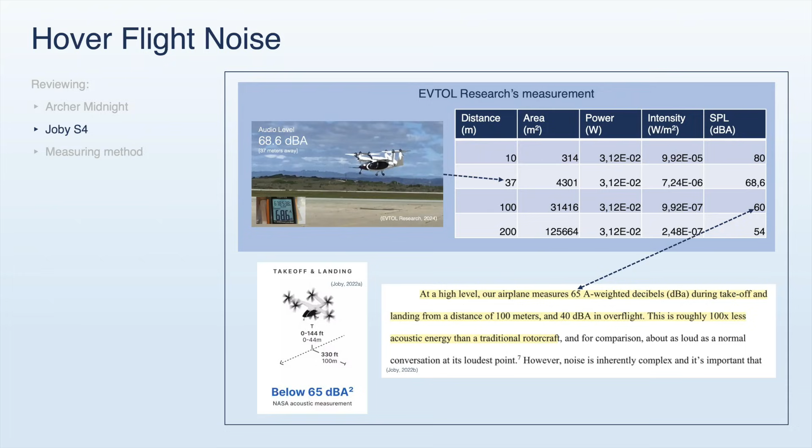If we calculate the sound pressure inside the aircraft, we find a sound pressure level of 80 decibels at 10 meters. At this level, I imagine hearing protection could be unnecessary, but still recommendable for passengers.

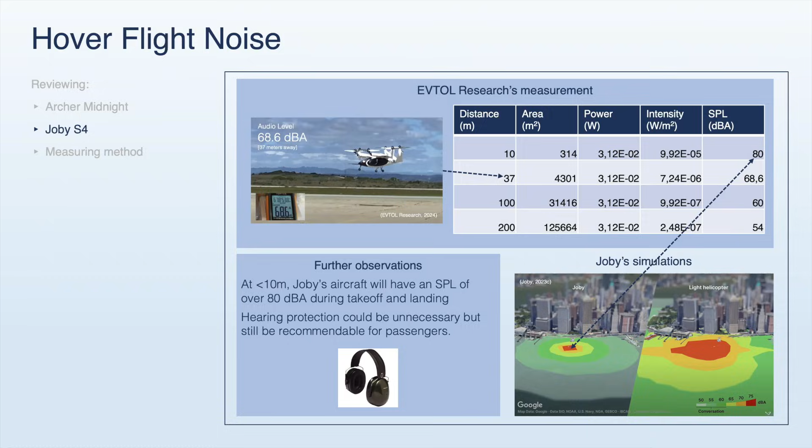Cruise flight noise. Archer claims that its aircraft will be 45 decibels when cruising at 2,000 feet, or 610 meters. If we look at the YouTuber's recording, we find that at this timestamp, the measured sound pressure level was 45.2 decibels. However, the YouTuber did not mention or measure the distance from the aircraft at this point, so it is unclear whether Archer's claim has been achieved.

Meanwhile, Joby claims that its aircraft will be 45 decibels when cruising at 1,640 feet, or 500 meters. This means that Joby's target is even more ambitious than Archer's, since the same 45 decibels must be achieved at a closer distance. Like before, the YouTuber did not measure the distance from the aircraft, so it is unclear whether Joby's claim has been achieved.

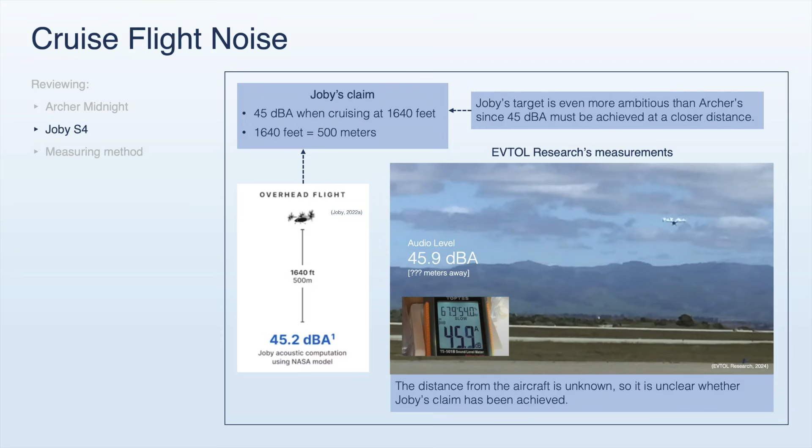I should mention the flaws in the YouTuber's measurements, because they must be considered when drawing conclusions. The flaws are: the aircraft's weight is unknown. It is unclear if Archer and Joby flew at full payload. If these test flights were conducted without payload, the aircraft can operate at a lower throttle and should be quieter.

Second, the acoustics environment was not controlled. As discussed, the acoustics environment influences sound measurements. As we can see from the pictures, the environment of the two aircraft was very different. Archer was flying over an open grass field, whereas Joby was flying over a concrete floor. Third, it was only a single measurement, so there were no repetitions. And fourth, the measurement method was very simple, as seen from the pictures. There was no microphone array or things like that.

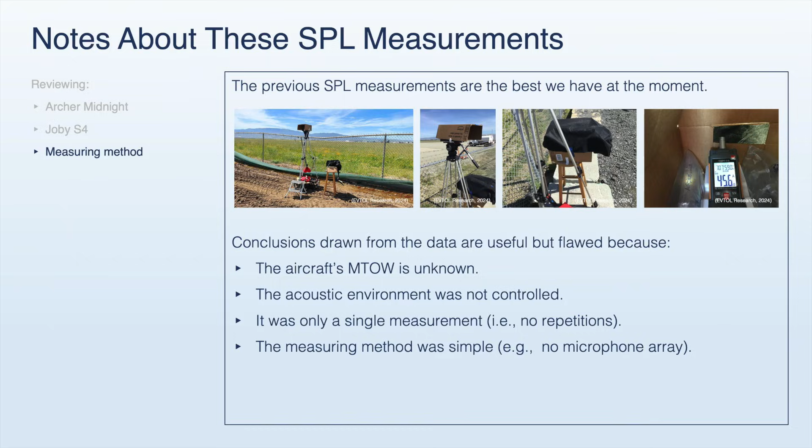Nonetheless, these measurements are the best we have at the moment, at least in the publicly available space. So it is still useful to draw conclusions as long as we are mindful of its flaws.

Next, let's watch Joby's YouTube video using the knowledge we have learned so far.

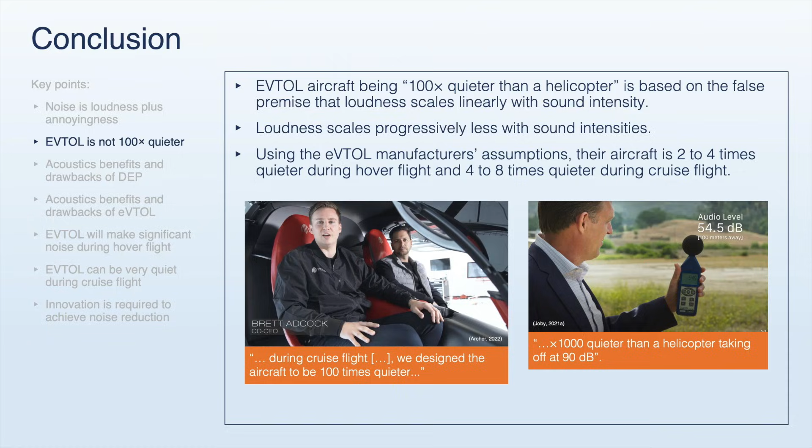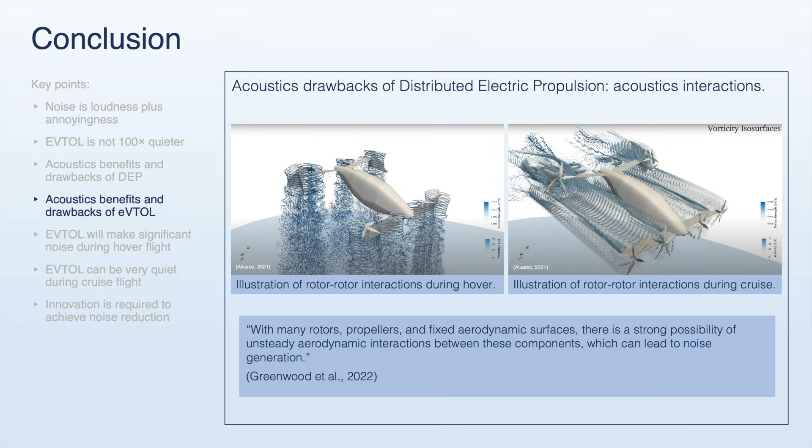Distributed electric propulsion has acoustics benefits and drawbacks. On the one hand, it enables greater rotor control, creating opportunities to minimize aeroacoustics interactions via rotor phasing and spread the acoustic power over a wider frequency range via rotational speed control. However, there are downsides to distributed electric propulsion too. As another aeroacoustics expert writes, with many rotors, propellers, and fixed aerodynamic surfaces, there's a strong possibility of unsteady aerodynamic interactions between these components, which can lead to noise generation.

In terms of electric vertical takeoff and landing, there are acoustics benefits too. For example, one benefit is that Joby's eVTOL aircraft will only use a fraction of its available power and thrust for cruise flights. Or, looking at this from a different perspective, Joby's aircraft uses a much larger rotor disk area than conventional airplanes for cruise flights. This means that Joby's aircraft will operate with very low blade tip speeds and with very low blade loading, resulting in very low sound pressures. This is a clear benefit that helps reduce noise drastically.

However, the aeroacoustics downsides of electric vertical takeoff and landing can be felt at hoverflights. Since eVTOL aircraft have high disk loadings, they are inherently in a worse position to achieve low noise. Consequently, eVTOL manufacturers like Joby must increase their rotor solidity to achieve their requirements for low noise.

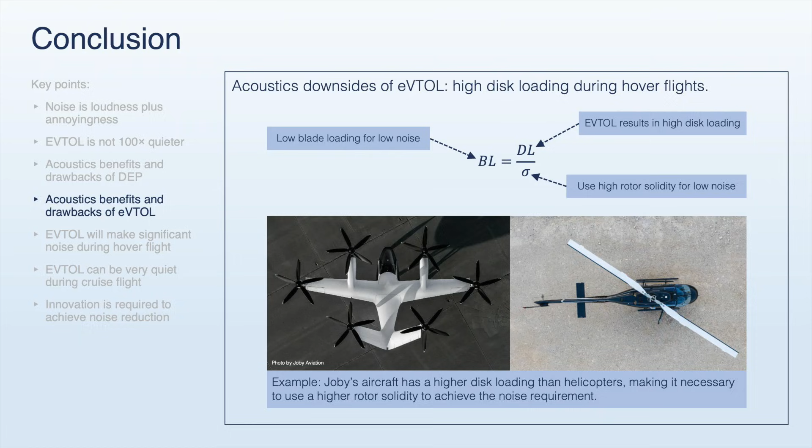We just discussed aeroacoustics from a theoretical point of view. What about in practice? As we saw from real flight tests, eVTOL aircraft are mostly comparable to conventional helicopters in terms of loudness during takeoff and landing. Some eVTOL aircraft may be 2 to 4 times quieter. In terms of noise, some eVTOL aircraft can be a lot less annoying than helicopters due to less tonal and more broadband noise.

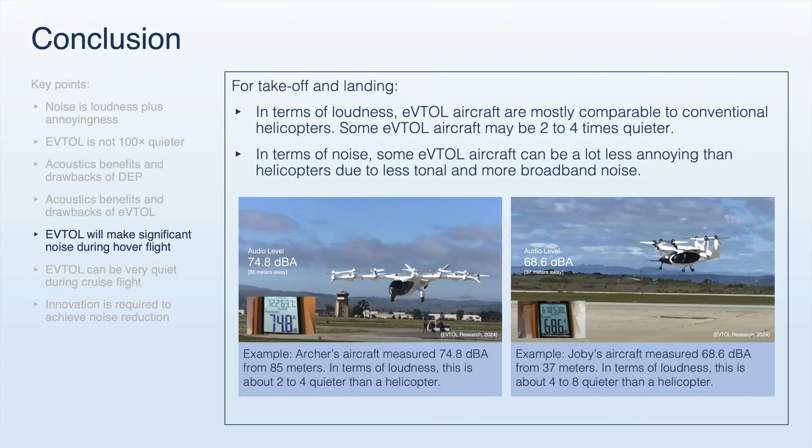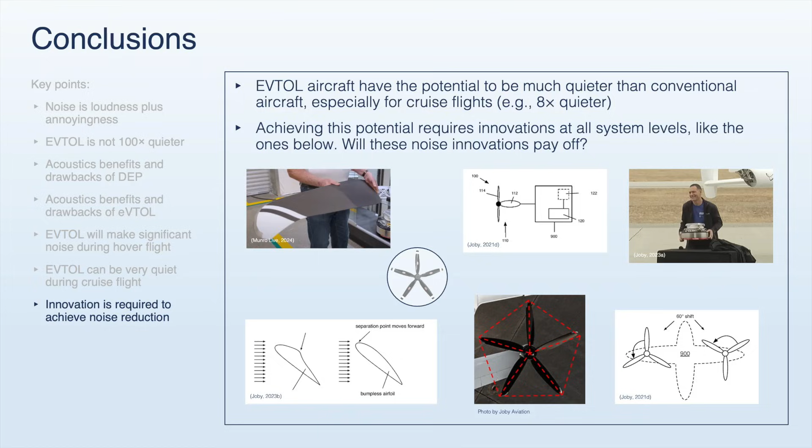eVTOL aircraft have the potential to be much quieter than conventional aircraft, especially for the cruise phase. Innovation is required at all system levels to achieve this acoustics potential. Innovations like the ones reviewed in this presentation can separate great eVTOL aircraft from the rest. However, these innovations also increase cost, engineering penalties, and risks. The future will tell us if such a strong focus on noise optimization, like the ones made by Joby Aviation, will pay off.